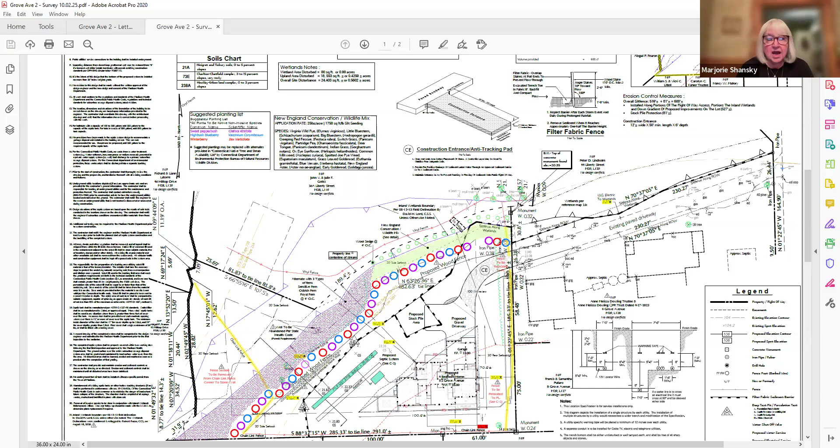Great, thank you. Attorney Shansky, was there something you wanted to add? Good evening, Madam Chair, members of the Commission, Marjorie Shansky for the Lindsays. I don't have anything I want to add at this time. I am very interested in what questions the Commission may have about the proposal.

Okay, agency members, questions for the applicant? I'm happy to start, I'll start with one.

I noticed that there's geothermal wells. Is that- no? No, that's just a standard note, I think that was note number 9. Yeah, so number 9, that's a standard note. I spoke to my client today and she said, what are geothermal wells? So no, we're not proposing any geothermal wells. If we do, we'll come back to the commission, but at this point we are not proposing any. That was just a standard note that goes on the plans with septic designs.

And I assume, I didn't mean to interrupt, but we are removing a well that's on the property right now. Right, I saw that.

The other question, and maybe this is standard as well, since the septic is within the 100-foot review, it says if there's a big bathtub, or garbage grinders, the disposal, the septic has to be increased. Does that increase the size? I mean, is that going to push that closer to the wetland? No, it increases the tank size, that's all, due to the extra water.

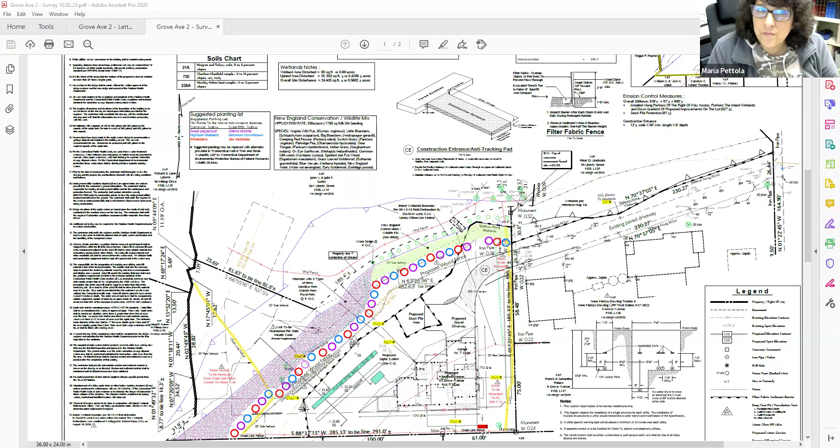We still have Madison wetland plaques sitting in our office from other jobs, so we could put those up every 30 feet or so, directly behind the fence on a 4x4 post or something.

Yeah, I think that'd be great to also discourage overzealous landscapers, etc. Now, I wouldn't do that along the existing driveway, just on the property itself.

Yes, just where it's lawn and where there are all those colorful planting circles. Okay, yep, not a problem.

Is that okay, Marge? Yes. Okay, I don't want to step out of bounds there. I got the counselor on me.

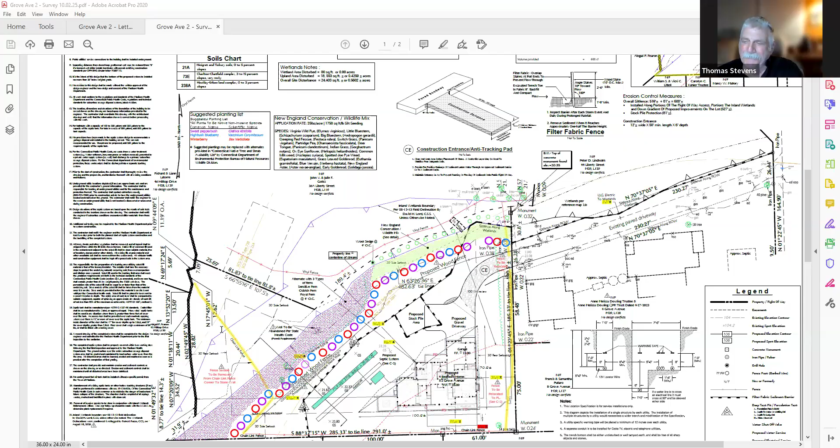Are there other last comments from any commission members? If not, I can share very quickly. Find my button.

You guys, is that the letter? Yes, can you guys see that?

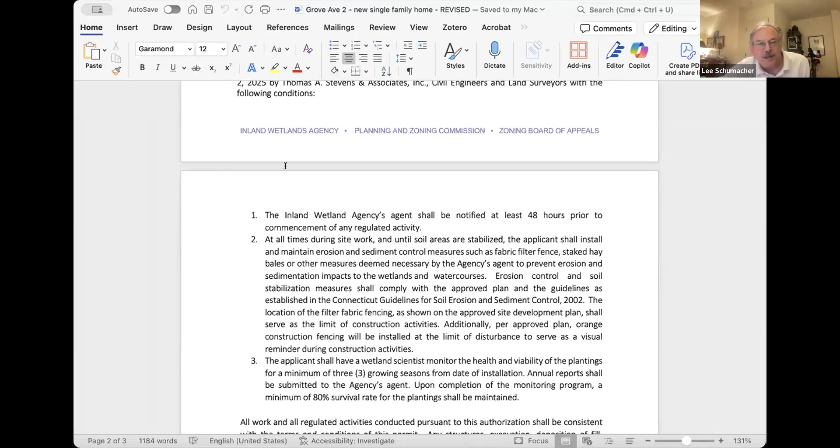Yep, okay. So I'll entertain a motion if no one else has any questions. I move we approve application 25-35 Two Grove Avenue with the conditions noted in the staff memo, 3 conditions, and an additional condition requiring the applicant to add wood posts behind the wood fence every 30 feet, denoting that it's a wetland.

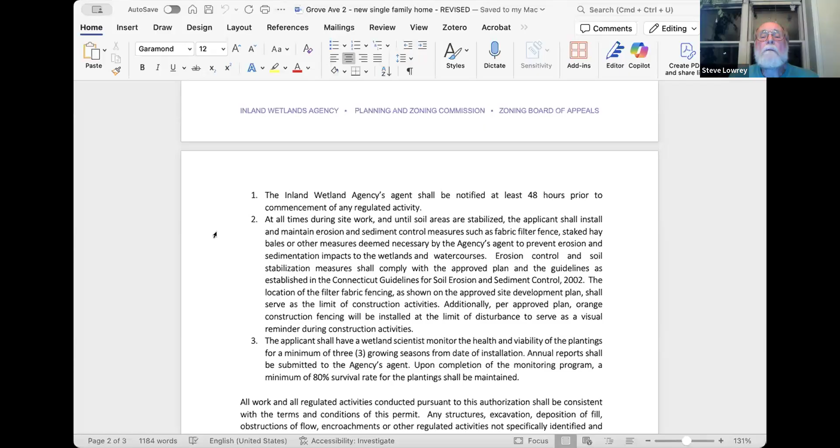Second. You have wetland markers that you can install on that? But we need a second first. Is there a second? I'll second.

All right, discussion. Yes, so Steve, Chuck said that he has markers and that they're round plaques that say Madison Conservation Wetland Boundary, something like that.

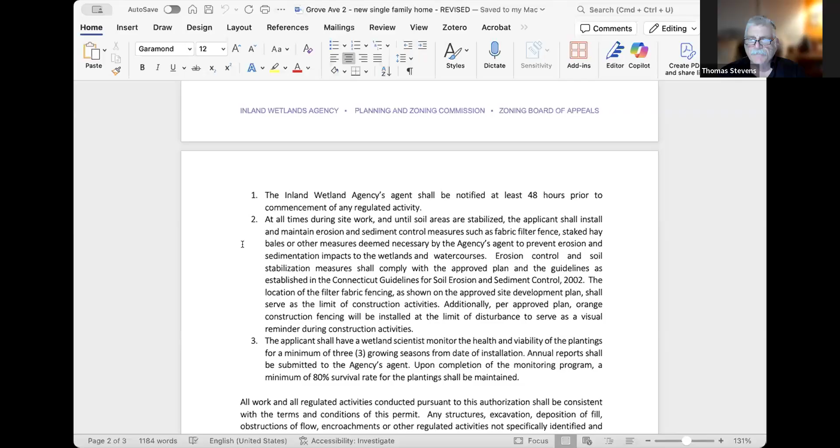I'll show Maria before we put anything up. Those were given to us by Bob Cookta many years ago, so those go on the 4x4 posts. Correct.

Other comments? Any? I will just note, Chuck, we don't necessarily need to have a condition, but I would note that just to be cognizant of the NDDB report and make sure that your soil scientist, in the breeding season, which is apparently April to August, notes if there's any yellow crowned night herons wandering about.

Any other discussion? Maria, Rio, did we update that? Yes, number 4 condition, the wetland boundary markers.

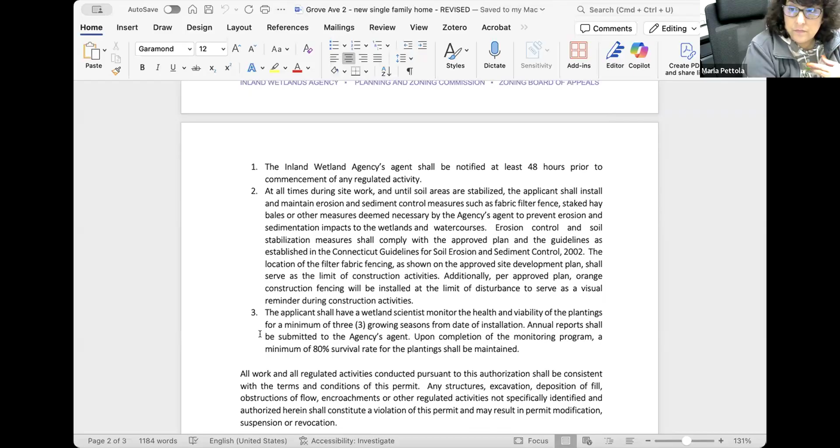All right, all in favor of this motion as conditioned, raise your hand, say aye. Any opposed? Any abstaining?

Okay, thank you very much once again. Thank you very much. Okay, take care. Have a good night. Good work, Chuck.

Okay, so good job, people. That was our only active application of the night.

So now we have 2 receipts. And so again, just to highlight with our receipts, we need to decide if we want a site walk and if it's a significant activity or not.

So our first is 25-39, 43 Green Springs Drive. It's a permit to remove an existing above ground pool and replace it with an in-ground pool within a 100-foot wetland review area.

So Maria, do you have any details, you probably looked at these more closely. This applicant had submitted an application from the building department quite a while ago, probably late spring or beginning of summer, but they required wetlands review, so they had to go through the process of getting them flagged.

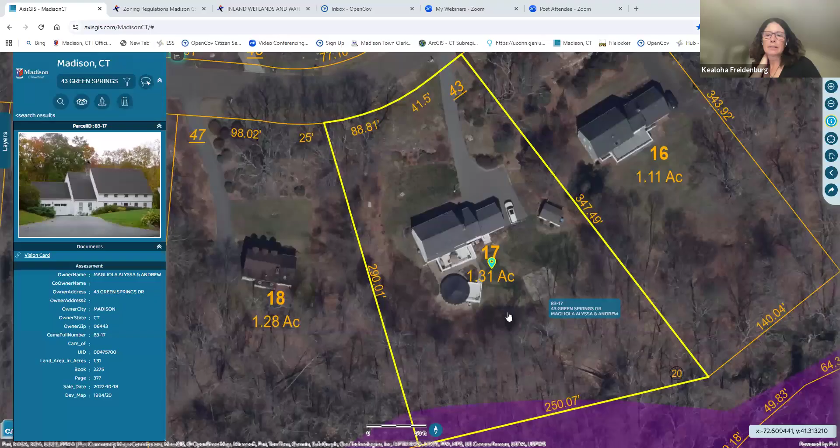Thoughts anybody? I guess I'm fine if we don't see it. I'm okay with it. I think we can look at this one from the maps, do a drive-by. Yeah, I think this is all good.

This is a retaining wall already, this is the deck, and I guess they're proposing to build in relatively the same area location. So the woods are gonna go right up to the pool, it looks like.

But they're not taking out trees, I don't believe so. There's just underbrush over here - the trees really don't start until back here. It was all a lot of brush where we were walking when we went out there at the beginning of the summer.

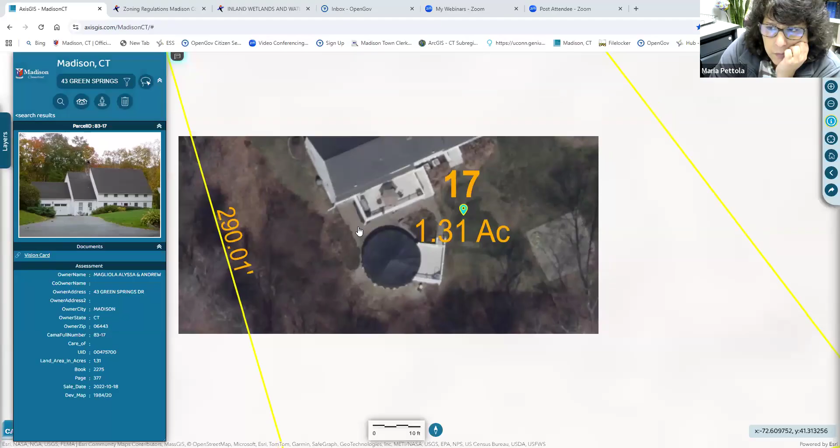So where your mouse is to the south, that's the patio still? Yes, south of the pool, this is all patio, this is a deck. I can't recall if this was ground, but it must all be patio. So it's already an impervious surface? Yeah.

Are they keeping that patio or adding to it? I don't recall. Well, that's fine - it's not a significant activity either way. It says patio and deck, but that's the way it looks on the plan.

Just let me know if anybody wants to go and see it, and then I can let them know. I have a question - they're gonna have to excavate.

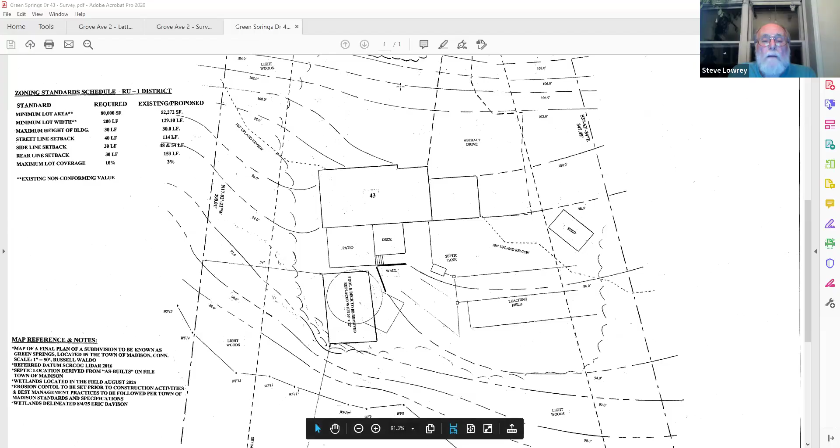I assume they're gonna be taking dirt off the property since there really isn't very good places to put it. Well, they'll talk about that when they present it, I'm assuming. They didn't put a stockpile area, but I think this was just a surveyor doing this plan - these are things we can let them know, that we might want to know what happens to the dirt.

I'm sure some of it's gonna be leaving, some of it may be staying to fill in around the edges for landscaping, but... Sure, okay.

So the next receipt is 25-40, 38 Opening Hill Road. This should be familiar to everyone - this is one of these subdivision houses on Opening Hill that we've seen a couple times. And now there's another modification to add a 10 by 20 deck and patio within the 100-foot review area.

Can we see this one from the road? I have no idea what this looks like anymore.

Yes, there's been a lot. This is the one along Opening Hill, and there's other lots in the back here. Okay, so we could drive by and see what's happening.

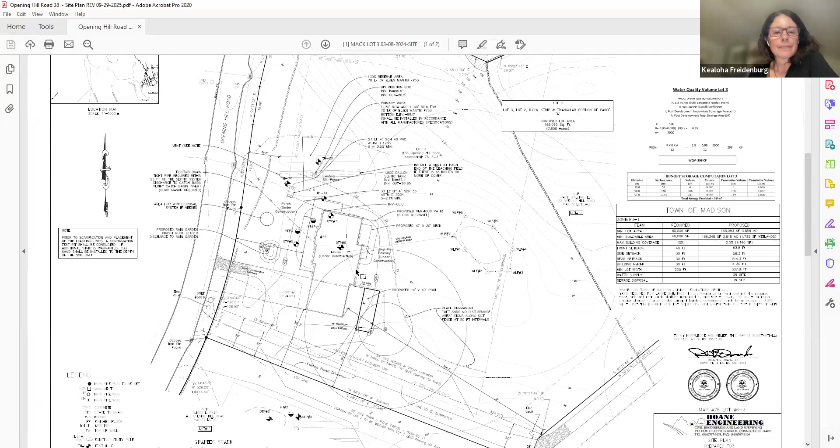Yes, so they wanted to add on. This one came back for the additional deck in the front. Then they added in a pool in the back, and they had to do a lot line revision. I think this might have had a bump out in the back and then a pool, and now they want to do this deck and patio over here.

We don't have to see that. Okay, hopefully this will be it, and no site walks. So it'll be done. All right, so no site walks. We'll see those next month.

Looks like there was a section 13, 25-38, 32 Nutmeg Lane, septic repair.

Oh, yes. But Joe's saying something, and you're muted. Oh, hi. Okay, I'm back. There you are.

It's because it's a modification of stuff we've already done. You can't modify and call it a 13? If you've approved it and then you've modified it, I just can't make the decision to section 13 it without showing you. So if you guys want to make that decision tonight, it looks pretty minor to me. I agree with Joe.

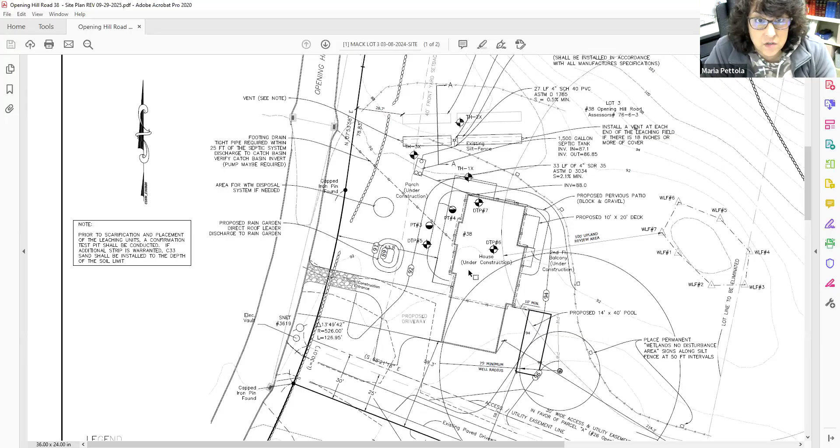Maybe in a different circumstance, but in this circumstance, since we did approve it and it's a modification on top of a modification, we should just own this ourselves. We don't mind, we've done this before. If you think it's a de minimis enough change, we could do it as a section 13, but in this instance I didn't want to say it without you seeing it. I think they should come and present what their changes are. Yeah, we need to hear exactly what they want to do and how they're going to do it.

So we'll see that and Green Springs next month. Nutmeg, it looks like we had a septic repair, which you get to do automatically.

And then we had the enforcement. Some of us were at the site walk for the visit to 131 Twin Bridge Road. It's still a cease and desist, and we're waiting to see their application. They did a lot of cart before the horse, submitted a building permit without a wetlands permit, without getting a septic plan review, without full engineering, A2, T2, all things. I gave them an extensive staff report, not just for wetlands, but as part of the building permit process, because they had submitted a building permit.

We talked to the owner, Ostino Severino, who was on site, and they already have an engineering and land surveying company engaged, and now they have a direction and know where they're going. They're in the process of designing the septic and will get approval from the health department, so it could be in the right place on the plan and we could review a regulated activity permit for the house, and they could get in the right order. The cease and desist was upheld, and we'll probably see them next month. I can update you on how they're coming along while we're waiting for the regulated activity permit.